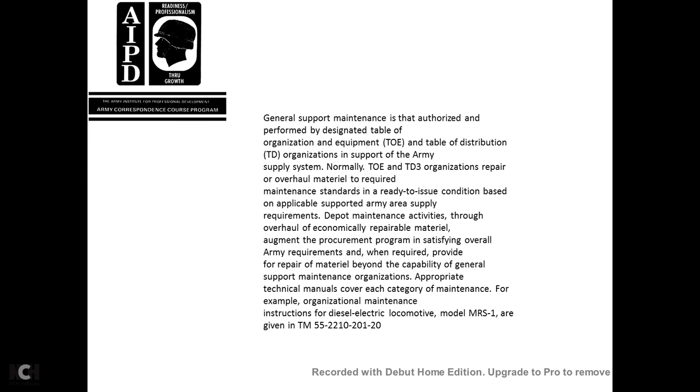Appropriate technical manuals cover each category of maintenance. For example, organization maintenance instructions for the diesel electric locomotive model MRS1 are given in TM 55-2210-201-20.

Since diesel engines range from about 59 to 2,590 horsepower, servicing the engine varies a great deal from the engine maker's service book instructions, but the pertinent technical manual should always be available to service personnel and referred to before any repair work is attempted.

Service schedules are usually worked out according to locomotive mileage and hours of operation. Hours in service are probably the best guide for servicing, tappet adjustment, and changing of oil filters and oil, while mileage is a good guide for spacing major overhauls.

The time between inspections depends on the quality of the fuel, lubrication, frequency of cold starting the engine, design features, atmospheric conditions of temperature, dust and humidity, and the load of the engine. Loads of less than 50% of maximum engine output for extended periods will increase engine maintenance.

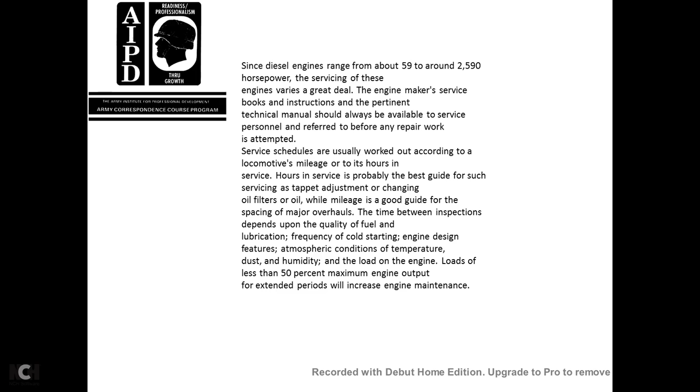This chapter explains the checking, lubrication, other general maintenance, and commonly serviced parts of the locomotive, following the pattern of Chapter 1. Maintenance of the mechanical parts is discussed in Section 1, and maintenance of the electrical parts in Section 2. Troubleshooting is discussed in Section 3.

Section 1, mechanical maintenance and repair. Chapter 2, Section 2, general.

Certain parts of the engine are repaired and others replaced because of wear. The engine maker usually lists the expected life of each part, either in miles or hours of operation.

Components subjected to continuous wear include the cylinder liners, piston rings, valves, springs, guides, and bushings, injectors, timing gears, camshaft, rocker arms, parts of the governor, parts of the fuel and lubricating water pumps, and regular checks should be made of the crankshaft, the most commonly worn part of the engine.

Crankshaft distortion causes misalignment. The bearings should not exceed 2 to 3 thousandths of an inch.

Auxiliary equipment such as traction motor blower, belts, water pumps, fuel pumps, and various control switches, relays, and protective devices should be removed for cleaning, calibration, adjustment, replacement with completely reconditioned units during the scheduled periodic inspection. Fuel, water, and steam lines should be cleaned periodically, and all valves inspected and repaired.

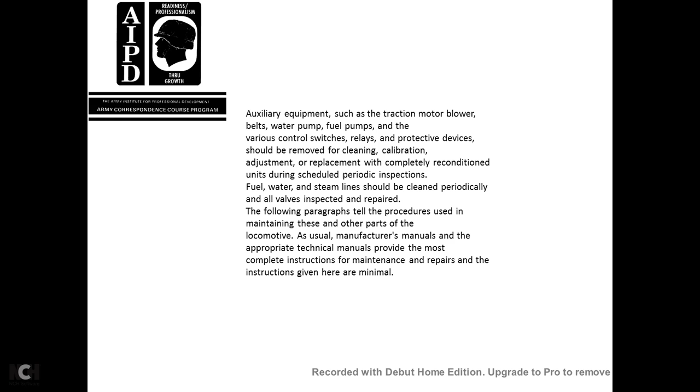The following paragraphs tell the procedures used in maintaining these and other parts of the locomotive. Manufacturer manuals and appropriate technical manuals provide most of the complete instructions for maintenance and repairs; the instruction given here is minimal.

2.3, the piston and connecting rod. The following procedure is given in subparagraphs A and B: remove and inspect cast aluminum pistons and connecting rods at 75,000 miles, forged aluminum ones at 85,000 miles.

Repair as necessary. Piston and connecting rod assemblies on locomotives used in switching may require more frequent repair. For pistons: before pulling the piston, remove any ridge on the liner with a reamer. The gaps of the rings can be measured most accurately while holding them in place on the liner.

After the piston is removed, clean the chips out of the crankcase. Clean the pistons, inspect them for defects, replace the first and second compression rings, and examine the piston pin and bearing for wear, cracks, and chips.

Connecting rods: cleaning and inspection. Make certain the oil passages are open and reject any defective rods. Examine the connection rod studs, bolts, and nuts. If seizure occurs before removal of the connection rod stud and bolt and nuts, remove the cotter pins and check the tightness of the nuts to determine if the bolts have been stretched. If they are stretched, they are not safe for further use.

The bearings: never force the bearing shells, as the bearing face may be scratched or the shell distorted. Note the identification mark on the shell so it can be replaced correctly.

Bearings should always be replaced in the same shells because of their location, so it can be determined how they are worn. To remove the bearing shells, take off the crankcase doors opposite the shells to be removed, rotate the engine, and set the piston at the opposite bank of cylinders so it has completely entered its liner.

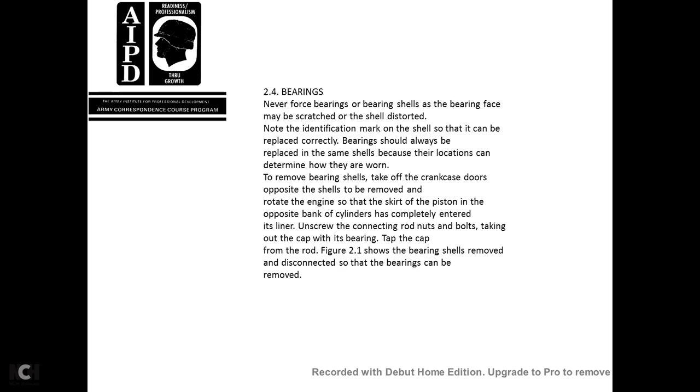Unscrew the connection rod nuts and bolts, taking out the cap and its bearing. Tap the cap from the rod, allowing the bearing shells to be removed and disconnected so the bearings can be taken out.

After the bearing is replaced, examine the grooves and oil holes to make sure the passages are free of obstruction. Also make a running test before releasing the assembly for service. Idle the engine a few minutes, then feel the bearing shell; if it is hot, smooth down the high spots of the bearings. Repeat the test with switching.

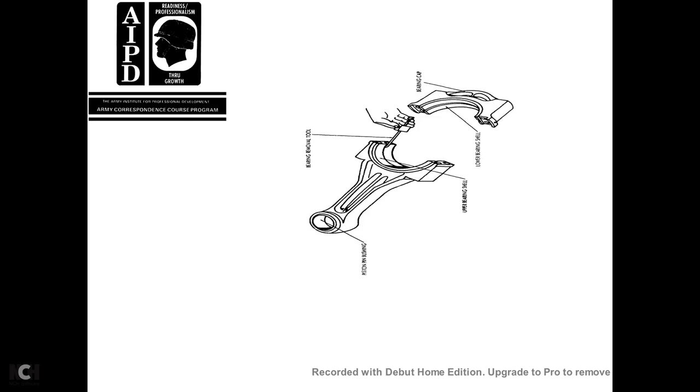On the locomotive, testing should be made consistent with light switching duty for the first 8 hours, followed by an inspection of the bearings at the end of the test. Inspection and maintenance procedures for bearings can generally be illustrated through the bearings in the connection rod, crankshaft, axle, and journal. This covers the connection rod for the crankshaft.

Periodical inspection of the connection rod bearings can be made without removing the piston and connection rod assembly, by blocking the bearing and backing the shaft away from the shell.

When the connection rod assemblies are removed, inspect the face and fillet of the crankshaft journal, and check the scored condition of the crankshaft journal to see if the score lines up with the bearing area. Smooth off all irregularities by stoning with a fine grit stone.

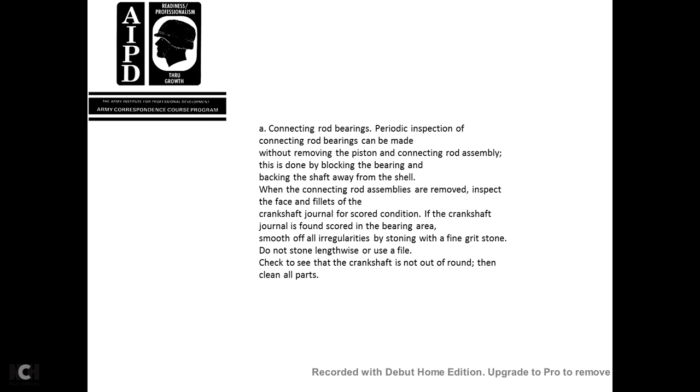Do not stone lengthwise or use a file. Check that the crankshaft is not out of round, then clean all parts. Be sure to line up the oil holes when replacing the connection rod bearings in place.

They must have a clearance at the crankshaft journal. The clearance should be at least 1/10,000th of an inch of crankshaft diameter, unless otherwise specified. The thrust face must be parallel with respect to the crank cheek.

Crankshaft bearings receive lubrication by a forced lubrication system built into the engine proper. The bearing alignment is assured by the rigid engine frame and method of mounting. However, misalignment may occur if one or more of the bearings are permitted to wear unduly.

As the bearing becomes low, the span will increase between the bearings supporting the shaft. That will introduce heavy stress on the crank pins. If this condition is permitted to continue, it will result in crankshaft bearing failure.

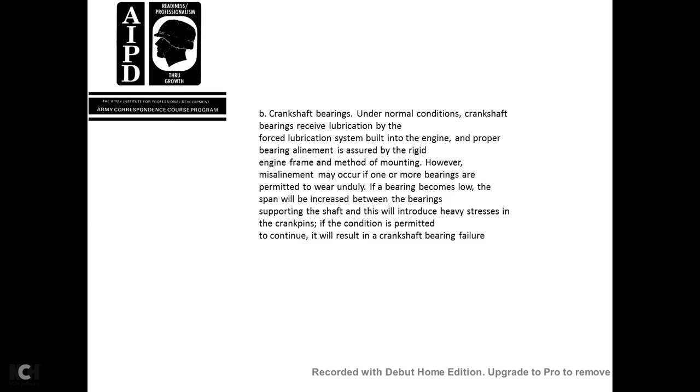Crankshaft bearings can be checked in several ways. One method: locate the crank pin at the upper dead center, and force the shaft down to the firm seat of the bearing.

The regulating valve is located on the inlet side. Measure the distance between the gauge points of the crank cheeks with a micrometer or strain gauge. There, locate the crank pin at lower dead center.

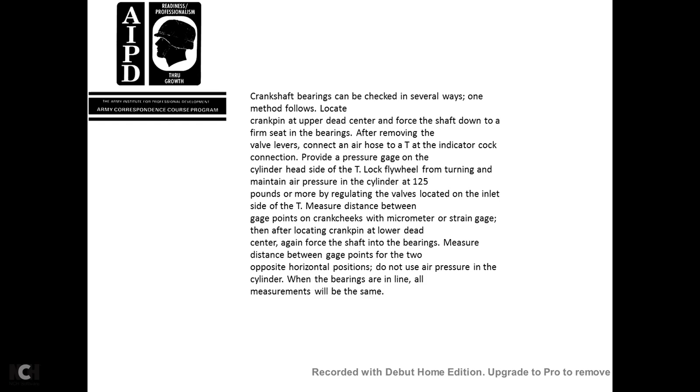Again, force the shaft against the bearings, measuring the distance between the gauge points for the two opposite horizontal positions. Do not use air pressure in the cylinder for this. When the bearings are in line, the measurements will be the same.

In most diesels, the top bearing shell is movable with the cap. The lower shell is rolled out and onto position on the crankshaft. Unless bearings at the opposite end of the engine are being removed at the same time, they should be removed one at a time.

In order to do this, the crankshaft must be held in position. The shell should be rolled out into position in the same direction as the rotation of the crankshaft.

Crankshaft bearing failures are often caused by shaft misalignment. Flexing or turning conditions may be traced to misaligned bearings resulting from low, distorted bearing supports or a cracked engine frame. The bearing support should be tight and in perfect alignment before the shell is installed.

When checking the wear of the bearing, measure the shell thickness with a micrometer at both sides at the bottom and at the position showing the wear. If any number less than a complete set of bearings is renewed, the shell must be scraped with a fine grit stone of within 1,000th of an inch, the same thickness as the adjoining bearings or of the old shell.

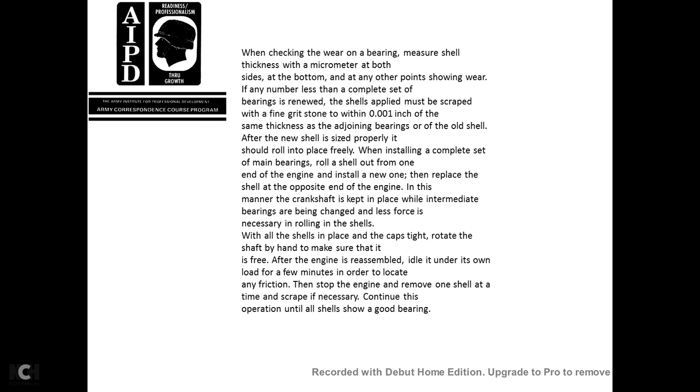With the shells in place and the cap tight, rotate the shaft by hand to make sure it's free. The engine is reassembled and idled under its own load for a few minutes in order to locate any friction. Then stop the engine. Remove one shell at a time and scrape it if necessary. Continue the operation until the shells show a good bearing.

Axle bearings. Typical axle bearing maintenance involves checking the oil depth of 1 3/4 inch minimum or 3.5 inch maximum, measured on a slant. Change any glazed packing, making sure it is packed tightly against the windows and axle. Use a suction pump to take a sample of the oil from the bottom of the chamber and check it for water. If water is found upon withdrawal of the oil, repack the bearings with fresh packing. Bearings normally require repacking every 25 to 30,000 miles of service or every 6 months, whichever comes first.

To repack axle bearings, first empty and clean out the packing chamber. Fit the axle caps with the spring packing pusher. Insert a wedge between the pusher and the axle to keep the spring compressed while the bearing is being packed. Saturate all the packing to be used with warm oil for 24 hours, allowing it to drain for 12 hours at a temperature of approximately 85 degrees so that the oil will not congeal.

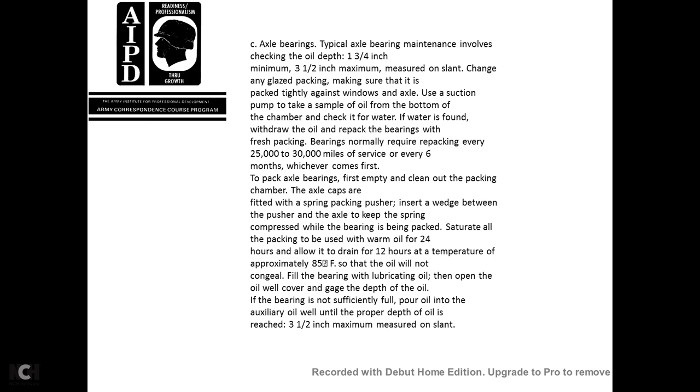Fill the bearing with lubricating oil, then open the oil well cover and gauge the depth of oil in the bearing if it is not sufficiently full. Pour oil into the auxiliary oil well until the proper depth of oil is reached, 3.5 inch maximum, measured on a slant.

Journal bearings. All parts of the journal box are interchangeable when new, but after the parts of the assembly have operated together for a long time, each part wears to fit the adjoining parts. For example, if during manufacture a slight irregularity were left on one part, the adjoining part would, after a while, wear and conform to the shape of that irregularity. For this reason, the journal box and bearing should be treated as a unit, used only on the journal to which it belongs. The bearing is usually made of an alloy of tin and copper called Babbitt metal.

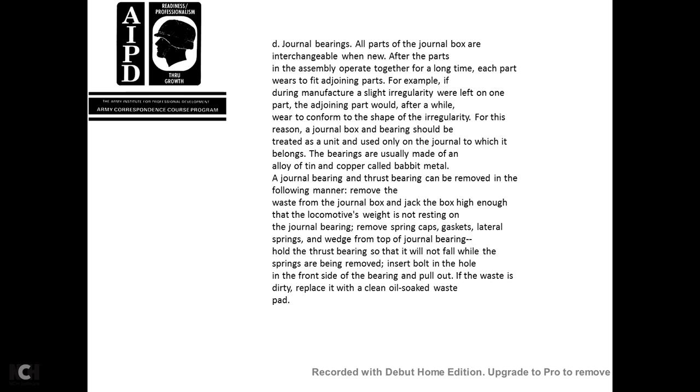A journal bearing and thrust bearing can be removed in the following manner: remove the waste from the journal box, but jack the box high enough that the locomotive weight is not resting on the journal bearing. Remove the spring cap, the gasket, lateral springs, and wedge at the top of the journal bearing. Hold the thrust bearing so that it will not fall off as the springs are being removed. Insert a bolt into the hole on the front side of the bearing and pull it out. If the waste is dirty, replace it with a clean, oil-soaked waste pad.

V-belts. Correct tension should be maintained with the V-belt. If the belt is too loose, it will slip and cause wear to both the sheave and the belt, and cause the engine to overheat. If it is too tight, the bearing is subjected to overload and will wear rapidly.

Belt tension may be checked by depressing the belt at the center. The amount of deflection varies somewhat due to variation of the drive center distance, but usually proper deflection will run from 1/2 to 1 inch. The pressure exerted at the center of the belt when checking deflection should be normal, the pressure exerted with one finger without straining.

Whenever a set of belts is being applied, the center distance of the drive must be reduced so that the belts can be placed over the sheaves freely. If this were not done, it would be necessary to force the belts into the sheave grooves, causing ply breakage and cover damage, resulting in short service life of the belts.

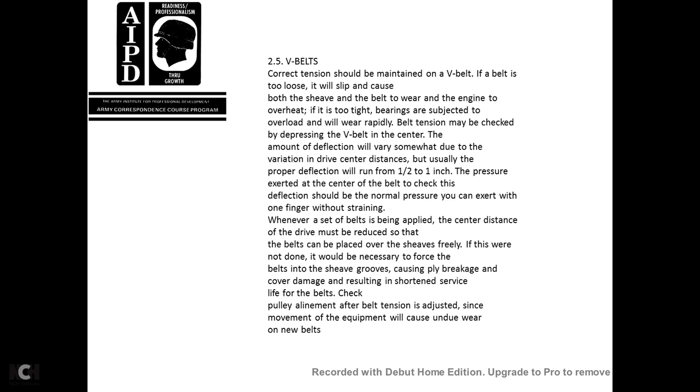Check pulley alignment after the belt tension is adjusted, since movement of the equipment will cause undue wear on the new belts. After a set of V-belts has been applied, the drive should be run at least 15 minutes, allowing the belts to stretch, become well seated in the grooves, equalize on both sides of the drive, and be checked for correct tension.

After the belts have been run in, check the belt deflection. It should be about 1 inch mid-span. Run the drive at top speed, checking the driven pulley speed with a hand tachometer. If within 5% of the calculated speed, the belts are tight enough.

However, if the driven pulley speed cannot be brought up to the rating, check the wear condition of the sheaves, since badly worn sheaves may not deliver proper speeds.

To find the speed of the driven pulley, use the following formula: speed of the driving pulley times the diameter of the driving pulley, divided by the diameter of the driven pulley, gives the speed in revolutions per minute. The same formula is used for flat belts as for V-belts.

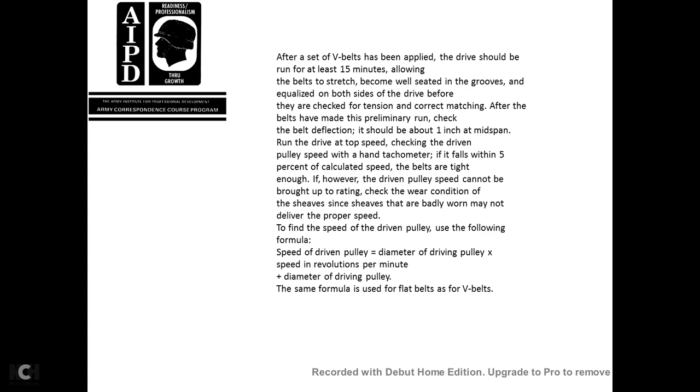2.6. Aligning of the shafts. When two or more rotating shafts are coupled, proper alignment should be provided to eliminate vibration and bending of the shaft.

The method of securing satisfactory alignment will vary with the number of bearings on each shaft and the type of coupling. If the shafts have single bearings and are aligned properly, there will be no radial displacement between the coupled ends, and no angular displacement of the shaft.

If each coupled shaft has more than one bearing, the type of coupling used must permit a small amount of radial and angular displacement, since it is not always possible to achieve absolute alignment between two shafts carried in separate housings.

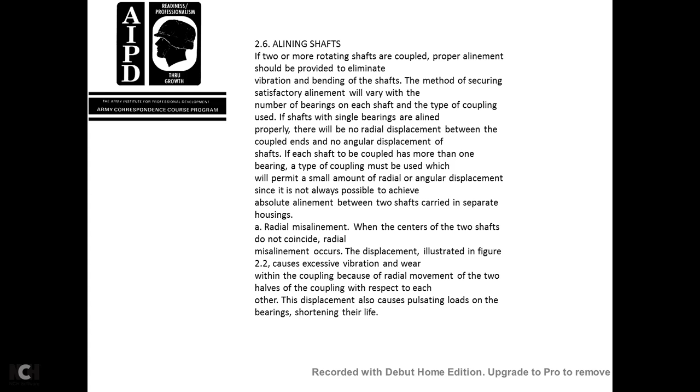Radial misalignment occurs when the centers of the two shafts do not coincide, as illustrated in figure 2.2. This causes excessive vibration and wear in the coupling because of the radial movement of the two halves of the coupling with respect to each other. This displacement also causes pulsating loads on the bearings and shortens their life.

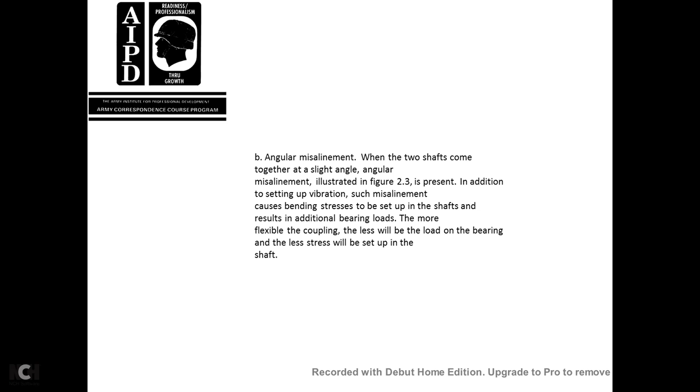Trucks must be clean and lubricated as required by the maintenance schedule lubrication orders when inspecting trucks. Check the main casting, pedestal, liner, and swing hangers for damage or wear, bolts and nuts and other fittings for tightness, center plates and side bearings for excessive wear, and springs for weakness, cracks, and broken leaves.

In addition, with the test equalizer and the magnetic tester, the maintenance of wheels, axles, and journal boxes is a little more detailed, involving more than a routine checkup of wear. Wheels and axles may have to be turned or renewed.

If the wheels are renewed, remove them from the axle, then test them by the magnetic method. Repair motor mounting, axle bearings, caps, and inspect axle gears. Clean and lubricate brake cylinders. Check the slack adjuster. Inspect and repair the complete air brake.

Jacking pads are provided on the body of the locomotive to support the locomotive frame while raising it off the truck. To remove the wheel and axle, without removing the truck, use a drop table to drop the axle.

New wheels may be applied using the same axle gear, with the axles not inspected at each wheel removal. It is recommended that axles be scrapped when 2 pairs of wheels have worn to the condemning limits. Axle gears, if not subjected to non-destructive inspection, should not be used beyond the life of 2 axles.

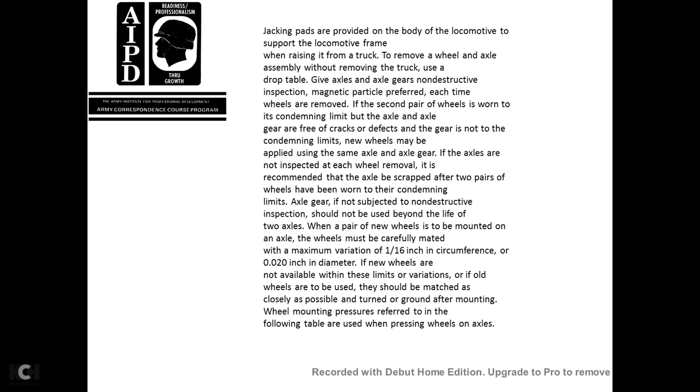Old wheels meant to be reused should be matched as closely as possible, and turned and ground after mounting. Mounting pressure is referred to as following the tables when using the pressing wheels on an axle.

Wheel mounting pressures in tons: minimum and maximum pressure limits are absolute, with no tolerance allowed. The 3 3/4 by 7-inch nominal wheel seat is 5 1/8 of an inch: minimum 30 tons, maximum 55 on cast iron, 50 and 70 on steel wheels.

4 1/4 by 8-inch, minimum wheel seat diameter 5 3/4 of an inch: cast iron 35 and 60 minimum maximum, steel wheels 55 and 80.

5 by 9, 6.5 nominal wheel seating, with 40 to 65 cast iron, 70 to 100 steel. 5.5 by 10, 7-inch wheel diameter, 45 to 70 cast iron, 75 to 110 steel.

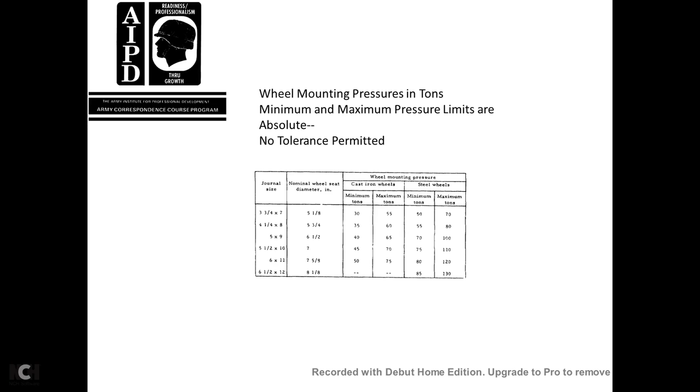6 by 11, 7 5/8 inch, cast iron 50 to 75 and 80 to 120 steel. 6.5 by 12-inch, 8 1/8 inch nominal wheel seating: there's no cast iron, steel wheels are 85 to 130.

Journal boxing: before repacking the journal box, clean and examine for cracks that might leak oil. Saturate the new packing in oil at a temperature not less than 70 degrees Fahrenheit for at least 48 hours. When packing, sufficient drained oil should not drip from it, but should flow from it when squeezed.

Stored packing must be kept in tight containers so that it won't dry out.

Air brakes: before each trip, check the brakes to ensure the air compressor is provided with air, and that the pressure regulating devices and brake valve are working properly and in position. Water has been drained from the air brake system, and the gauge is shown in figure 2.4.

Wear and damage of the brake rigging should be corrected immediately, along with brake cylinder piston travel. This should be set according to standard operating procedures, adjusting whenever the necessary travel exceeds 2 inches from each piston, or when the levers, pins, and bushings have worn until the braking travel can no longer be adjusted between the turnbuckle and the brake pull rod bank.

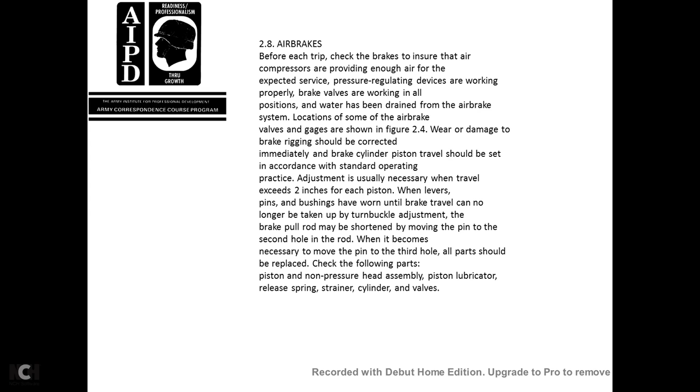Shorten by moving the pin to the secondary hole in the rod; when it becomes necessary to move the pin to the third hole, all parts should be replaced. Check the following parts: piston and non-pressure head assembly, piston lubricator and release spring, strainer, cylinder, and valves.

Piston and non-pressure head assembly: clean the piston and non-pressure head assembly with hydrocarbon cleaning fluid unless otherwise specified. If there are cuts or deep scratches in the packing cup or bearing surfaces, or if worn so that it does not hold properly against the cylinder wall, replace it.

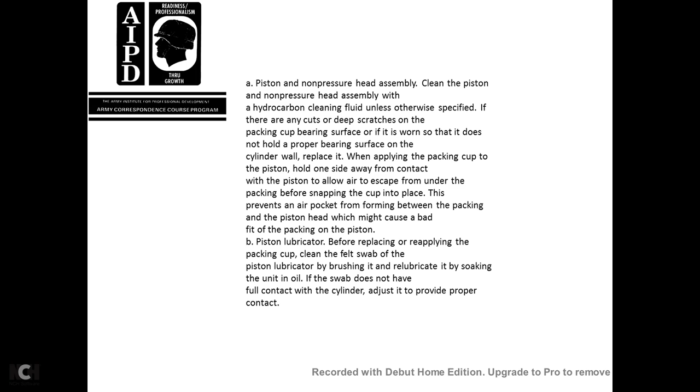The release spring: check for dirt and rust on the spring, clean it, and give it a coating of approved rust preventive. If not cleaned, dirt or rust might get into the cylinder wall strainer.

Coat the cylinder completely, along with the hollow piston rod, using a standard brake cylinder lubricant applied to the release spring and felt. Lubricate the non-pressure head using the same fixture for holding during dismantling, but before applying the reconditioned piston and non-pressure head to the cylinder.

Clean the cylinder walls, lubricating them with a good grade of brake cylinder lubricant, and ensure the non-pressure head gasket is in good condition.

Do not replace if you can simply clean the gasket face. Clean and repair, lubricate the valvular parts of the equipment at regular intervals. Do not mishandle them while on the locomotive.

Rather, remove them and take them to a shop equipped for cleaning, repairing, and testing. Clean the dismantled valve assembly with hydrocarbon cleaner and dry with air or a clean cloth. Soak felt lubricated parts in standard triple valve oil. Drain them, and examine the oil and rubber wear for cracking, flats, beads, or other damage. Repair or replace the metal parts as necessary, reassembling and lubricating the friction surfaces.

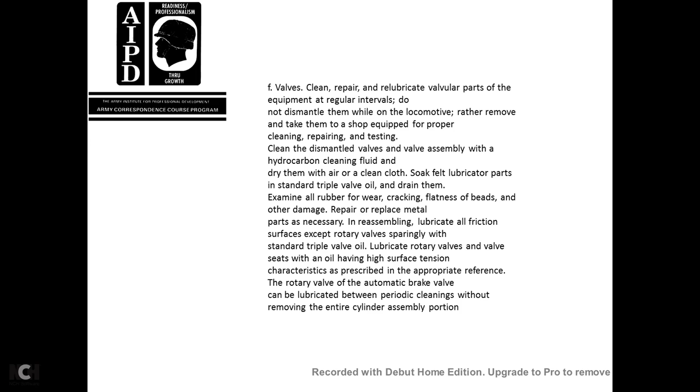The KM vent valve is equipped with a self-lubricating piston. After cleaning the piston, remove the plug in the center and saturate the felt wick with standard triple valve oil. Plugs in the oil ports of the independent brake valve self-lapping portion, which lead to the felt expander.

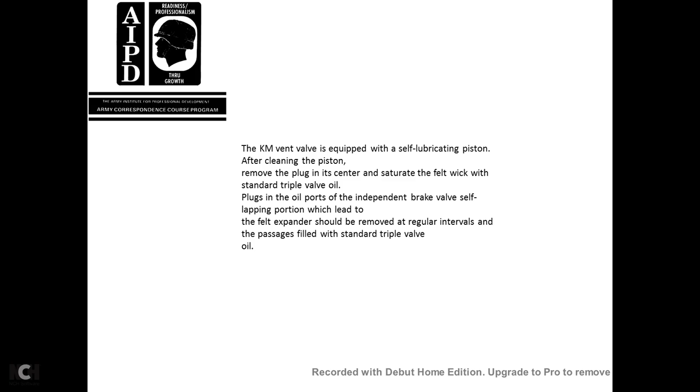This should be removed at regular intervals. Fill the passages with standard triple valve oil.

2.9. The sanders are checked before each trip to see that they operate properly and that the jets and vent ports are not plugged. The sand control valve should be checked and cleaned annually or as conditions require. Check the spring and replace it if it is weak.

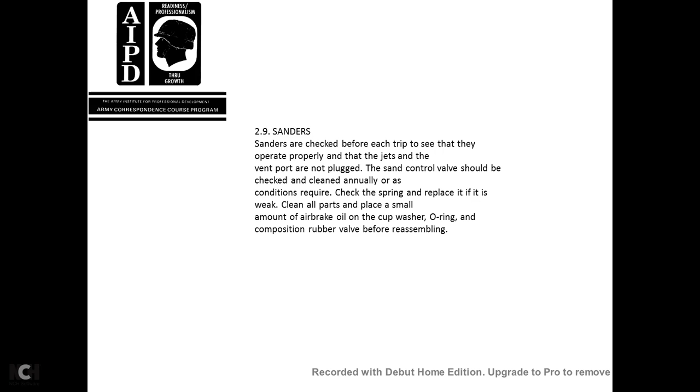Clean all parts and apply a small amount of air brake valve oil to the cup washer, the O-ring, and the composition rubber valve before reassembling.

2.10. Fuel pump adjustment. The balance of power of the cylinders can be checked by measuring the maximum pressure and exhaust temperature of each cylinder. Low pressure and high temperature indicate late timing. High pressure and high temperature indicate that too much fuel is being injected.

The amount of fuel being injected is checked in the following way. The intake and exhaust valves are closed, and a Swanneck pipe is installed in place of the pump's delivery pipe and valve. Move the pump rack bar to the full load position.

Turn the engine around until fuel stops flowing through the Swanneck pipe. The pump is then ready to be tested. Delivery from each pump element is led off into a set of test nozzles and discharged into measuring cylinders. In this way, the discharge for each pump can be measured under working conditions.

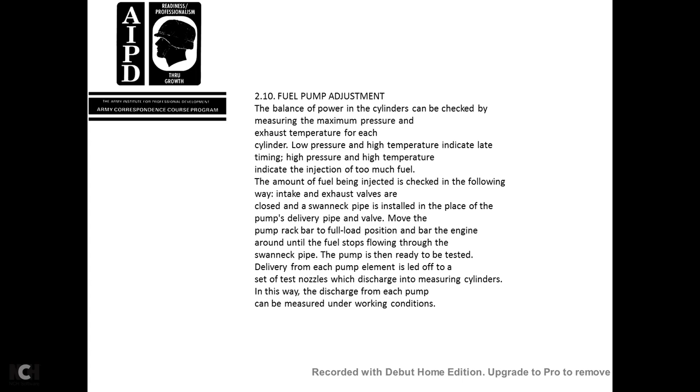To measure the fuel flow, the number of pump strokes must be known to determine the quantity of fuel at the desired position. A counter measures the number of strokes in either the forward or reverse direction. The adjusting screw indicates the position of the fuel rack.

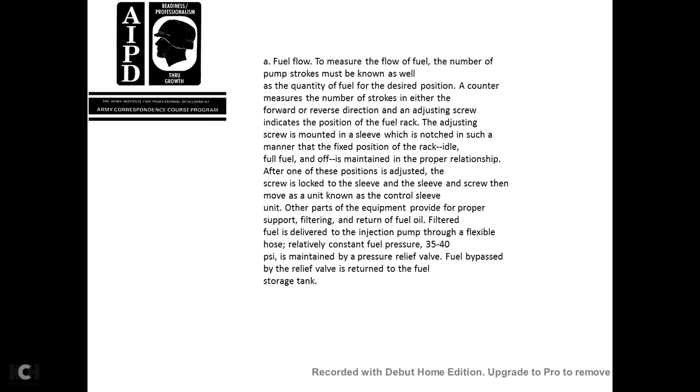Other checks, after making sure that the injector nozzles are working properly: check the fuel pump discharge valve and spring assembly, with load, speed, timing, and water jacket temperature remaining constant. Compression, cylinder pressure, and exhaust temperatures should remain normally constant.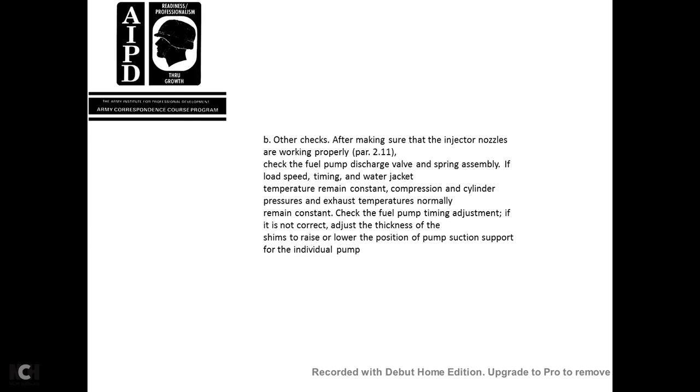Check the fuel pump timing adjustment, and if it is not correct, adjust the thickness of the shims to raise or lower the position of the pump suction support for the individual pump.

2.11. The injection nozzle. If faulty, the injection nozzles can cause cylinder knock, overheating of the engine, and exhaust smoke, and increase fuel consumption with a loss of power.

The tightness of all the nuts on the injector should be checked, since leakage at this point may prevent proper injection and lead fuel to drain into the crankcase lubricating oil. Whenever the injector is replaced, Nuts should be left slack until air bubbles are out of the pipeline and pure fuel is flowing.

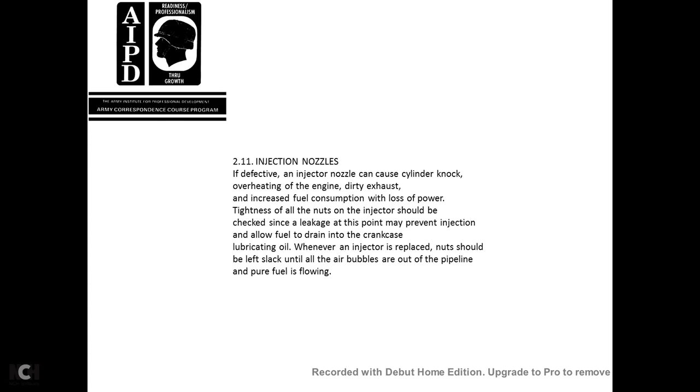When testing nozzles, be sure to spray directed away from the engine, because the oil must not be sprayed in the combustion chambers. Also, if it sprays and strikes the hands or face, it will penetrate the skin.

Check for fuel leakage at the holding nut, spring guide holding nut and lock nut, fuel lead-off stud, and the nuts holding the injection and overflow pipes and the holder. Some parts of the nozzles are shown in the cutaway sketch in figure 2.5.

When fuel pipes are installed, They should not be sprung into the catch of the nut. If pipes do not line up with their connections, they must be released and bent slightly. Clamp the pipes to prevent vibration.

If a nozzle valve sticks, smoky exhaust and engine pounding will occur. To locate the defective nozzle, cut out the cylinders in rotation.

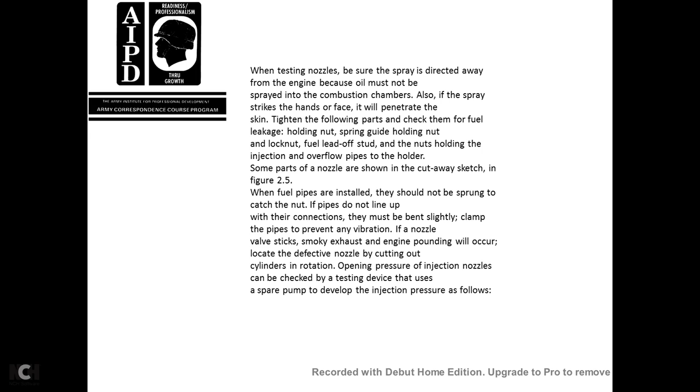Opening pressure of injection nozzles can be checked in testing devices using the spare pump to develop an injection pressure as follows: attaching a spare pump to the injection tube on the test rack.

Set up the fuel pump at the rack at the 20 millimeter travel to test the nozzle, pumping the lever steadily until the fuel discharges. Note the pressure indicated on the gauge, the maximum pressure noted with the gauge, at each stroke is the opening pressure of the nozzle.

Do not operate the lever quickly, as this will cause extremely high pressure to build up, giving an unreliable gauge reading. Turn the pressure adjusting screw on top of the nozzle holder until the manufacturer's pressure specifications are met.

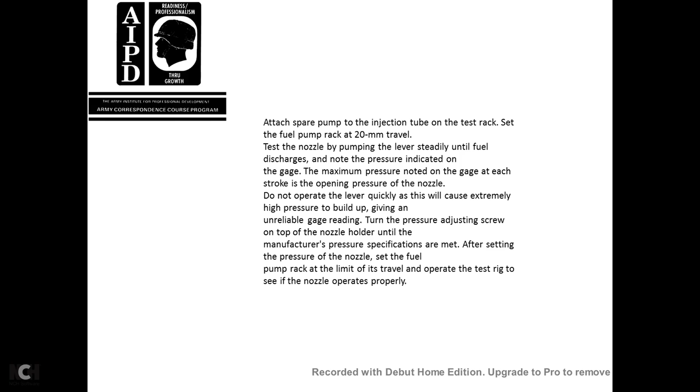After setting the pressure of the nozzle, set the fuel pump at the rack to the limit of its travel. Operate the test rig to see if the nozzle operates properly.

The flushing oil may either be regular oil used in the crankcase, or if used at temperatures of 150 to 200 degrees Fahrenheit, OE 10 light grade oil.

When using the light OE 10 grade, the engine should not be pulling a load or idling above a speed of 425 RPMs.

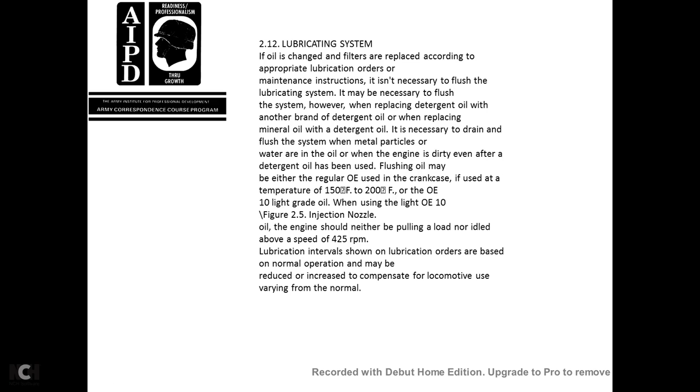Lubrication intervals shown on lubrication orders are based on normal operation, and may be reduced or increased to compensate for the locomotive varying from normal conditions.

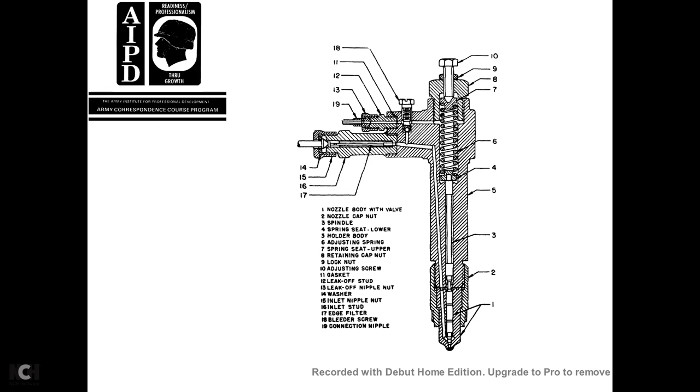This shows the injection nozzle diagram, starting from the top and going around: nozzle body, nozzle cap, spindle, spring seat, lower holder body, adjusting spring seat, upper retaining cap, nut, lock nut, adjusting screw gasket, leak-off stud, leak-off nipple, nut, washer, inlet nipple, inlet stud, edge filter, bleeder screw, and connection nipple.

213. The cooling system. Moving parts of the cooling system have to be oiled periodically.

Frequent cleaning or flushing of the system can be eliminated by using treated water, distilled water mixed with corrosion inhibitor. Untreated water causes scale to form, and if the system must be flushed, follow the flush with clear water until it runs clear.

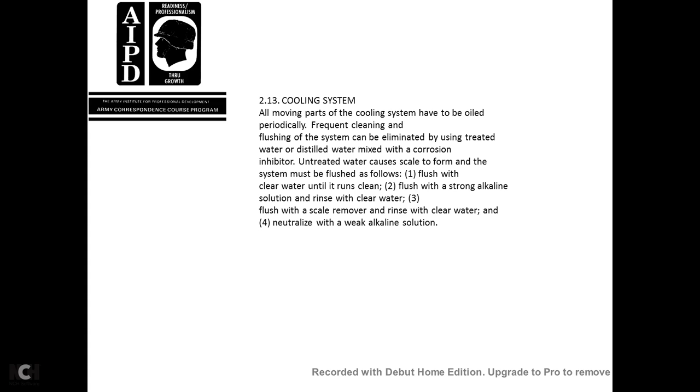Flush with a strong alkaline solution, then rinse with clear water. To remove scale, flush and rinse with clear water, then neutralize with a weak alkaline solution.

Clean and oil the air filter. Dry compressed air should be directed against the filter, or it can be cleaned with an alkali-free hydrocarbon solvent, dried, dipped in an oil bath, and drained.

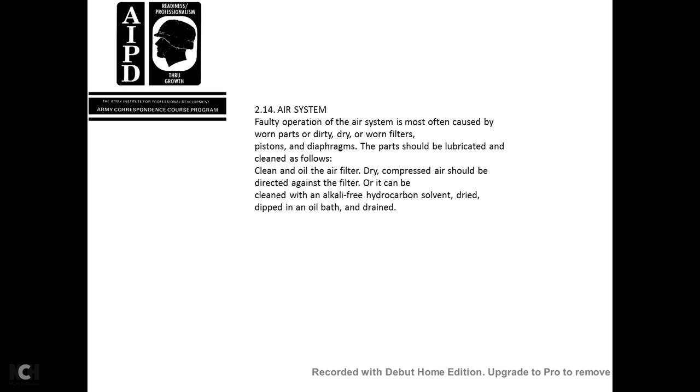Drain condensate from the intercooler, keeping the intercooler core sections clean to permit free passage of cooling air, and check the intercooler safety valve manually to be sure it is not stuck if the intercooling pressure is unusually high. Also check the operation of the high pressure suction discharge valve.

If the pressure is unusually low, check the operation of the low pressure suction discharge valve. Drain the intercooler every time the main reservoirs are drained; the drain cock is located at the bottom header of each bank of the intercooler tubes.

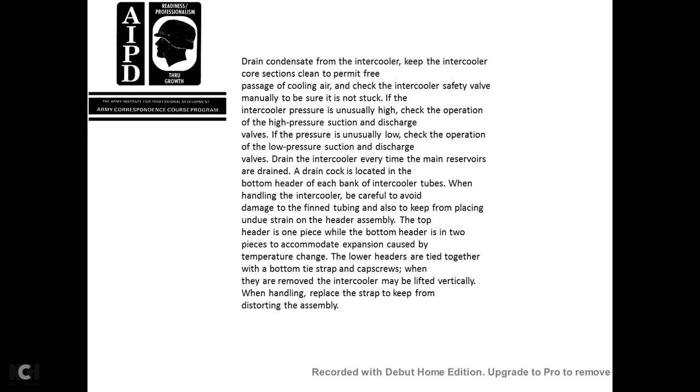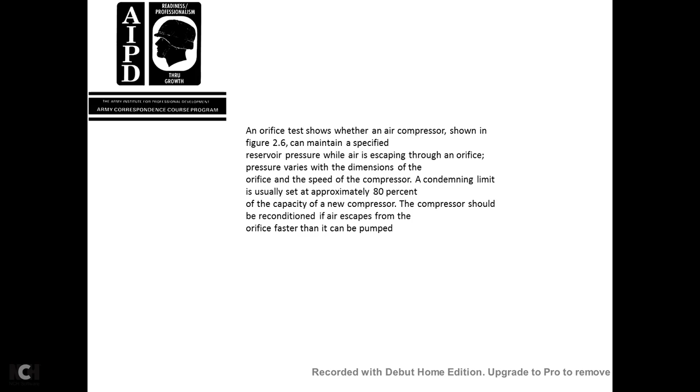Repairs of the air compressor consist principally of thorough cleaning of the installation, new piston rings, and renewing the valves. The bearings of the air compressor crankshaft should be inspected and replaced if necessary. Unless bearing trouble is experienced, the crankshaft will require little attention for long periods.

When occasionally disassembling to overhaul the air compressor, remove the compressor coupling from the shaft to prevent damaging the bearings. Before disassembly, clean the compressor and mark the parts so that they are reassembled in the same position.

Maintain the oil in the compressor crankcase at proper levels according to the maintenance schedules. Clean out the crankcase when the oil is changed, but do not use any flammable cleaning materials. If the oil pressure is too high or too low, check the oil relief valve and pump filters.

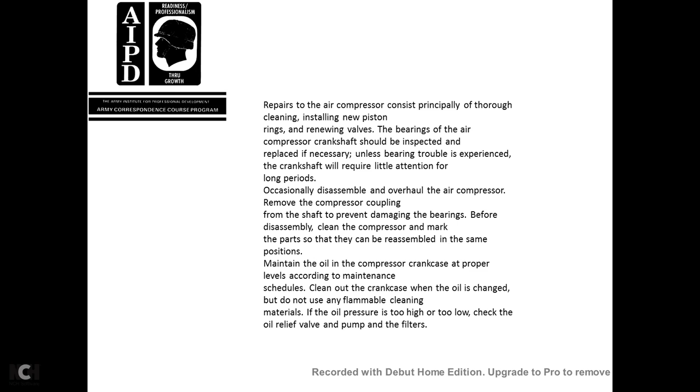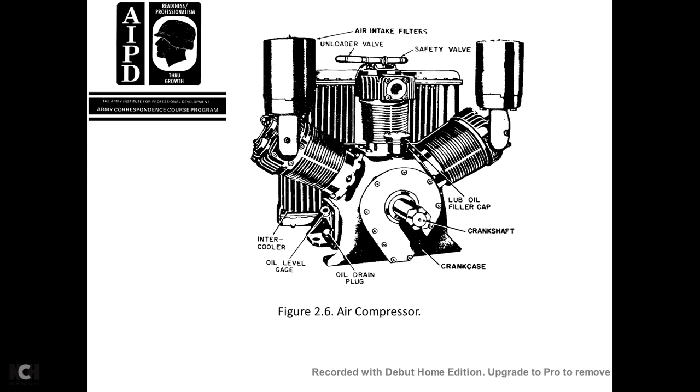Remove and inspect the cylinder liner and hone all cylinders retained in service. After honing, check the clearance of each piston in its cylinder with the piston rings removed. Also make certain the cylinder flange faces are perpendicular to the cylinder bore.

Replace the crankshaft if it is bent or cracked, or if the bearing seats are worn excessively. Check the valves for wear at the lifting limit. Examine the bearings and general condition for proper end clearance. Disassemble the compressor governor and clean it in oil approximately once a year, and clean or replace the strainer and element.

2.15. Testing the repaired engines. Each repaired diesel engine should be operated and checked before it is released for service. Time and labor spent on breaking in the engine will result in greater longevity and efficiency of the unit.

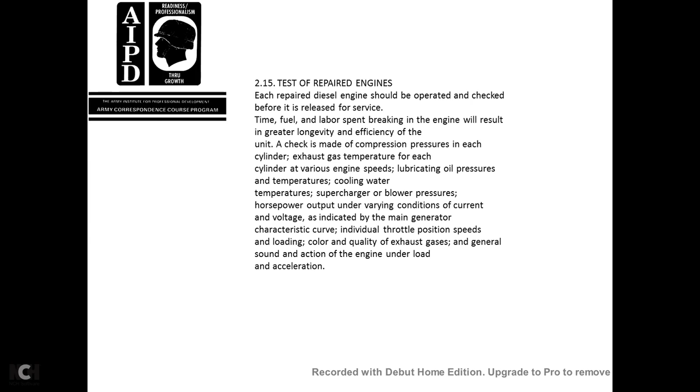The check is made of the compression pressure of each cylinder, the exhaust gas temperature of each cylinder at various engine speeds, lubricating oil pressure and temperature, cooling water temperature, supercharger or blower pressure, horsepower output under varying conditions, current and voltage indicated by the main generator, characteristic curves, individual throttle position, speed, loading, and the color and quality of exhaust gases.

General sound and the action of the engine under load with acceleration can be tested by simulating load conditions, sending current from the main generator through the dynamometer to measure the generator's output. The liquid rheostat water box also enables the engine to operate at different speeds, as will be done when installed on the locomotive, pulling different loads. The water box is seldom used, however, because of the danger of electrocution.

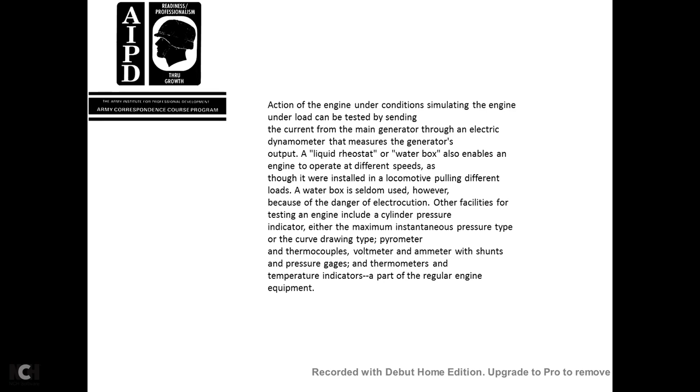Other facilities for testing the engine include the cylinder pressure indicator with the maximum instantaneous pressure and curve-drawing type, pyrometers, thermocouples, voltmeters, ammeters with shunts, pressure gauges, thermometers, and temperature indicators, which are part of the regular engine equipment.

2.16. The summary. Various maintenance services are ordinarily performed during the routine maintenance inspection; clean lubrication is part of the maintenance. Small and inexpensive parts may be easier to replace, so repair by replacement is often ordered. Other parts such as fuses and some filters are necessarily replaced. Balancing and adjusting parts is also common.

Remove and inspect cast aluminum bearings at 75,000 miles and forged aluminum ones at 85,000 miles. When removing bearings for check, be careful to avoid scratching them or distorting them in their shells. Clean and lubricate trucks periodically, turning, renewing, and replacing wheels and axles as needed.

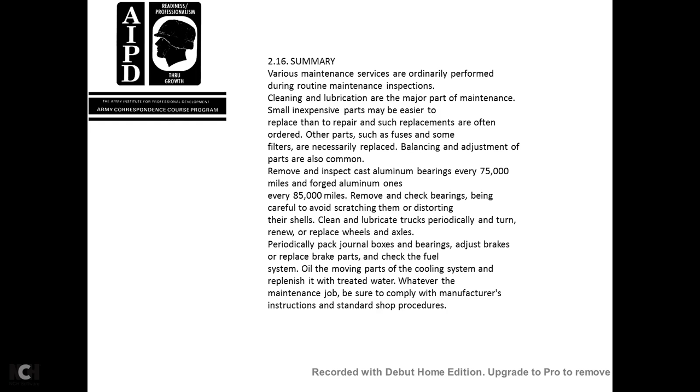Periodically pack the journal box bearings, adjust the brakes, replace brake parts, check the fuel system and oil, and service the cooling system parts, replenishing it with treated water. Whatever the maintenance shop does, be sure to comply with manufacturer's instructions and standard shop procedures.

Section 2: Electrical maintenance and repair.